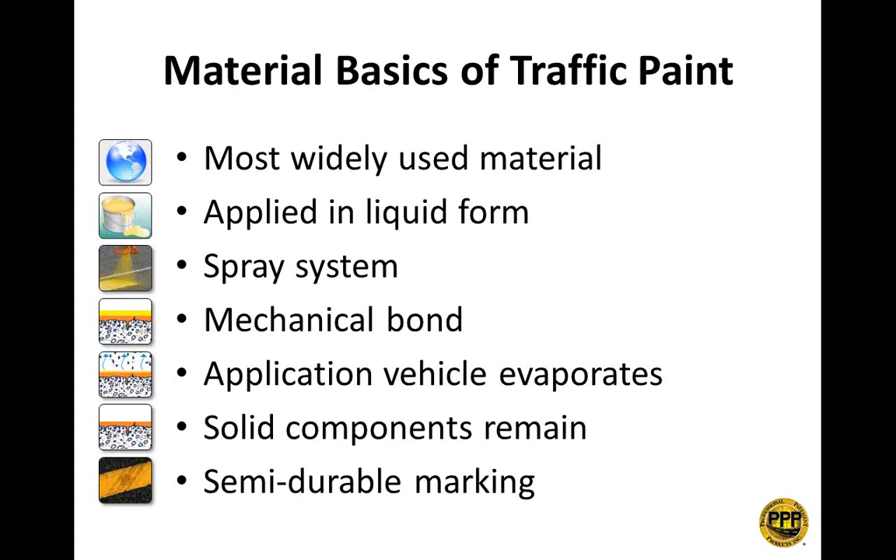It becomes what's considered a semi-durable marking. There are some advanced paints that we'll talk about in a few moments that go more to the durable side, but a paint typically is considered a semi-durable marking. So again, most widely used, it comes in a liquid form, you spray it down, it mechanically bonds as the application vehicle evaporates. That's usually water, and we'll talk about that in a moment. And then the solid components remain, and then you've got a semi-durable marking.

All right, next, 4 primary components. The 4 primary components of paint. First, we'll talk about pigment. It's either going to be yellow or white, red. It'll be the different pigment colors that we use in the paint, and that controls the color and also the opacity of the paint. And when we get into technical terms in a moment, we'll cover what opacity means. Most of these pigments are like titanium dioxide for your white, and a lead or an organic yellow pigment is used in your yellows.

Titanium dioxide is used in both white and yellow, just so that you know, and that's really what has caused, in the past, a lot of the volatility of the pricing of paint, because TiO2 has been on the rise for quite a while. Then you have the binder, and the binder, or resin sometimes it's called, is what gives you adhesion and cohesion. Adhesion is how well it sticks to the surface that you're applying it to, and cohesion is how well it bonds to itself. The resins that are typical are alkyd, oil-based, and acrylic.

Fillers. Fillers add body. Pretty much everything that is made has some type of filler in it. You either have some clays, some calcium carbonate, and so forth, to give body to the product. And then your application vehicle is what we were talking about a moment ago, and it evaporates off of the material. All it does is transport the solids and give the solids a chance to create the bonding, and then it evaporates off. And that's usually either water or solvents. So again, the 4 primary components of traffic paint: pigment, binder, filler, and the application vehicle.

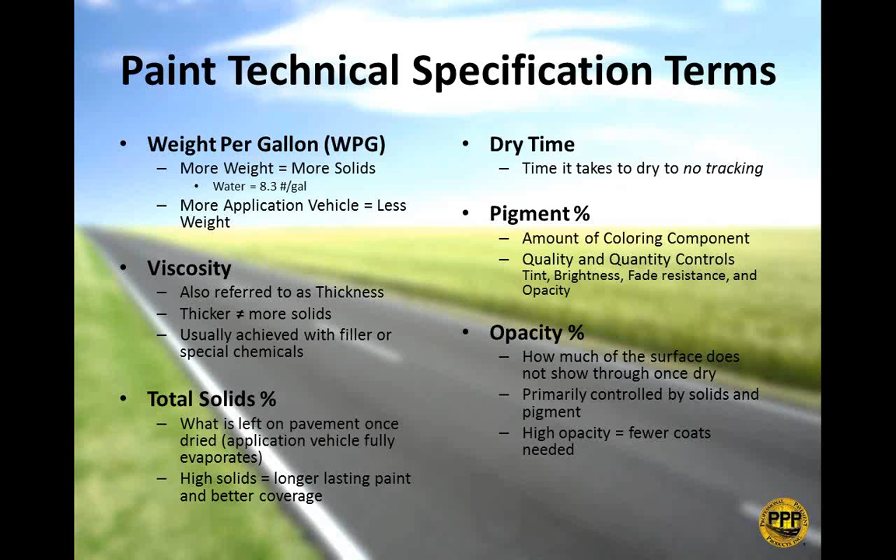All right, most of our discussion today is going to be on waterborne paints. But before we get started on that, I'd like to talk about the advantages and the disadvantages of waterborne when compared to oil-based paints. By the way, there of course are other paints like chlorinated rubber paints and so forth, and I'll be glad to answer some questions on how the paints compare. But oil-based is the primary opponent to waterborne.

Advantages of waterborne. It's more environmentally friendly. It is in the manufacturing, the application, and disposal, because remember, those are the three things that you're dealing with. You're not just dealing with somebody going to bend over and lift the stripe after application, but you also have the fact that it has to be safe to manufacture, and then it has to be safe to dispose of when either it's ground up or when you've got a pail that's almost empty but not quite empty. You need to be able to dispose of it.

It's low volatile organic compounds. Volatile organic compounds, that's what comes off of a paint or a product in the evaporation process, and so it's important that these volatile organic compounds do not escape into our environment and continue to cause the problems that we have experienced in the past and continue to experience. So it's better for the environment for that reason. And also, again, it's lead-free, and this is important in the manufacturing process and the disposal, along with the application and the applicator.

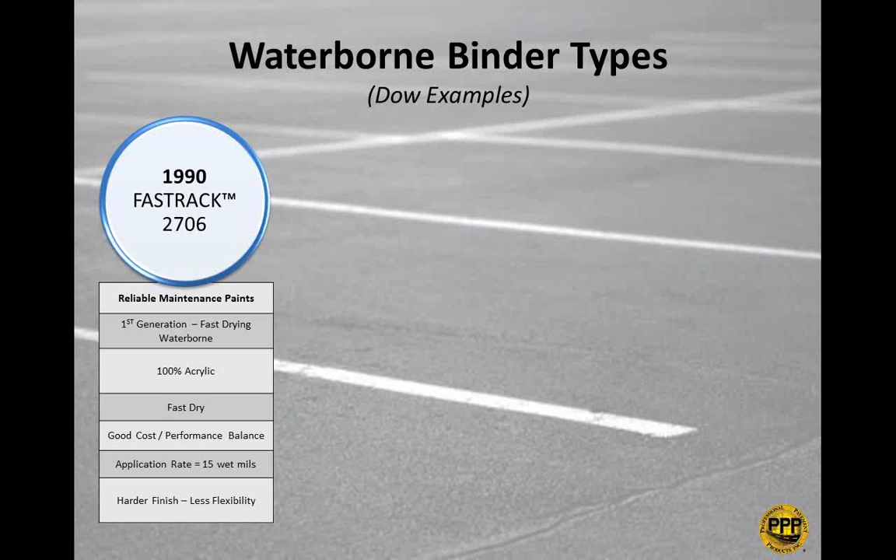It's 100% acrylic. It's fast dry. It's got a good cost and performance balance. It's economical, and it has good performance. Application rate, you put that down at about 15 mils wet. And of course, depending on your solids is what you'll end up with dry. And it has a harder finish, but as things get harder, they become a little less flexible. So this actually kind of causes a little problem, especially when

you're dealing with things. They came up in 1995 with Fastrack 3427. Now this is a second generation paint, and it's 100% acrylic, just like the first 2706. It is a fast dry paint. It's got good cost and performance balance. It's applied at 15 mils, but it creates a softer finish.

And of course, everything I'm doing here is really layman. If you're a chemist out there and you want to debate on my terminology, please do so. But to bring it down to a simple format, basically the finish is a little bit softer, but that softness also makes it more flexible, and it also has better surface and bead adhesion. 3427 works very well on concretes, more so than 2706, and I'll tell you a little story about that in a moment, my experience with that at least.

In 1999, they came out with Fastrack HD-21A. Now this is Dow again. The other company is I believe Arkema, and they have a DT211, 250, 400, so they do have products that are similar to these. Again, I wanted to make sure I mentioned that so I don't get in trouble again. This paint is designed to be high build durable paint. It's also called high build.

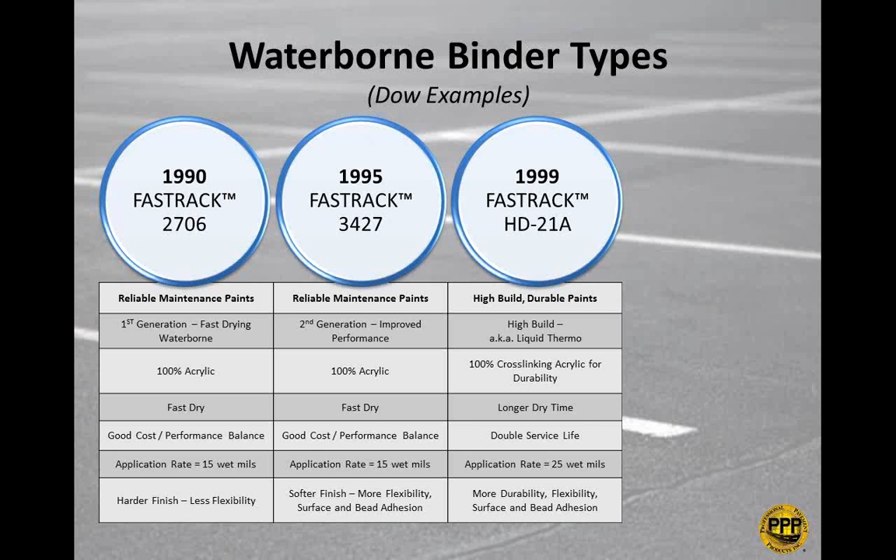It does have double the service life, 2 years plus. A great paint for that. Understand that you're using twice as much paint as well. It is more durable. It does have the flexibility, and it does have the surface and bead adhesion that is similar to or equal to the 3427.

Lastly, in 2006, they came up with the Fastrack XSR. This is a low-temperature resin binder. Low temperature conditions, that's 35 degrees and rising. Understanding that 2706, 3427, and especially HD21, you want to be at 50, 55 and rising. And you have to remember that's surface temperature and air temperature, very important. So in this particular binder, you can actually apply it at 35 degrees and rising. 100% fast release acrylic.

Fast to good dry time. You're going to definitely have some fast to good dry time, and what that means is that if you're at 35, you're going to have a good dry time. If you're at 75, you're going to have fast dry time. It certainly has lasting performance, and its application rate is 12 to 15 mils wet, and you have good flexibility over a variety of surfaces.

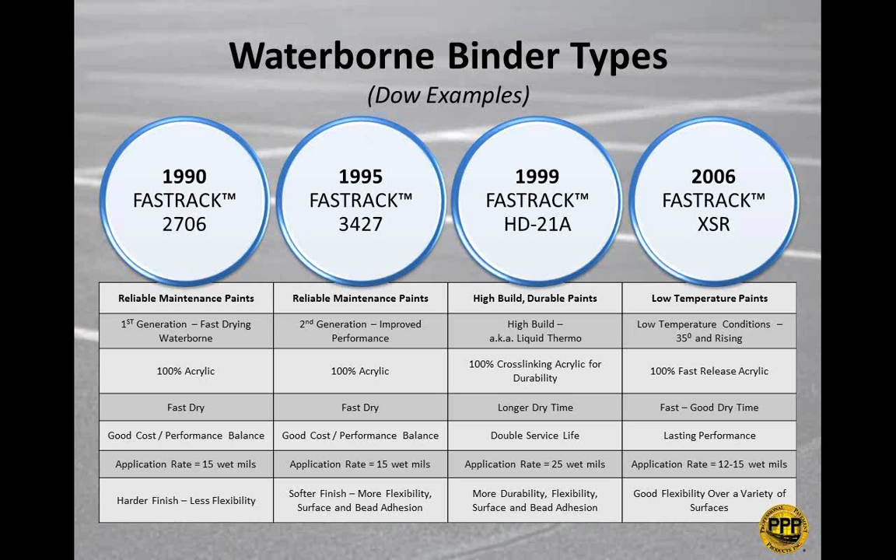So again, of these four, 1990 was the first generation, 2706. Second generation was 3427. Then we came in with the HD21, so we could get high build and longer lasting paint because we could put more of it down. The durability of a marking is directly related not only to the components it's made of, but to the thickness it's applied. So that's why, again, you put it down twice as thick, you're going to get twice the life out of it. And then, of course, the Fastrack XSR for those northern states that want to do some work as you get into those borderline seasons.

All right, here's a nice little slide I've seen. You'll see that's the alkyd oil base on the left. Then you go into Fastrack 2706. You can see how much more durable that is. And then your Fastrack 3427, which is even more durable than the 2706.

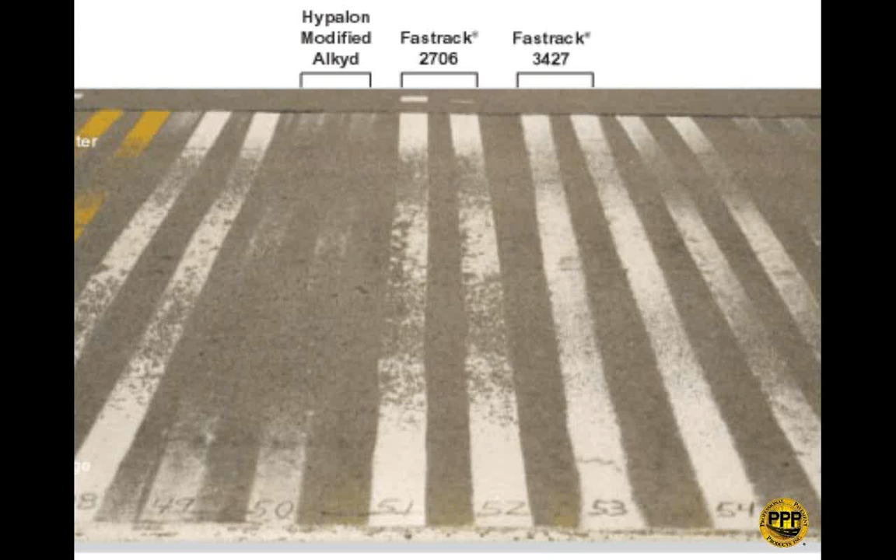All right, let's talk about the waterborne paints that we've developed in design. We have two primary waterborne paints. One is ProStripe Plus, and ProStripe Plus has been around for a number of years. I would have to say 14 years. I should know that. The ProStripe MX is not a new paint, but I think we developed that in about the 2008, 2009 range, and I'll tell you the story of why.

The features on the paints: they're both waterborne traffic paints. They both meet the federal specs of TTP 1952E Type 1 and 2, and we're going to talk about those specs in a moment. They're both lead-free. They both have low VOCs. They both have high solids, and they both are fast dry. They both have high pigment content, and they both are airless striper formulation.

When I developed the ProStripe Plus paint, the reason I went out and developed it instead of selling someone else's paint is that traffic paint is usually made in very, very large batches. And because of that large batch process, there's a lot of variance. There's variance in its viscosity, all the way down to its fills. We were having major variances.

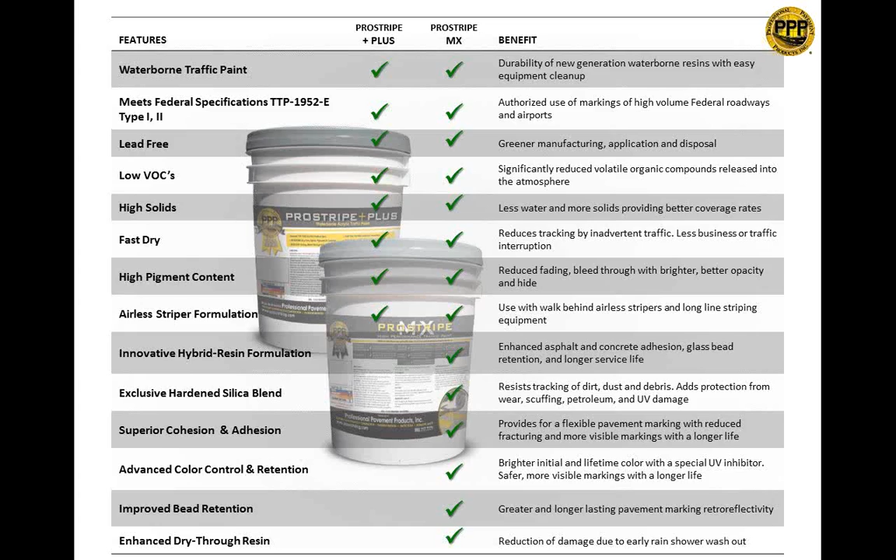Now we're going to get into specifications. I have listed before you 3 specs: TTP 1952B, TTP 1952D and E Type 2, and TTP 1952E Type 3. These are the standard waterborne specifications set by the government. So I want to go over these so that you know, when you go out and you buy a paint, this is really one of the first questions I ask. If I'm talking to somebody about paint, I'll say, okay, what spec are you going? Oh, it's federal spec. What federal spec are you talking about? Because there's a big difference between a 1952B and a 1952E Type 3, as you'll see.

So first we have the volatile organic compounds. On all 3 paints, it is low. You have a coverage rate of about 350 on the B, 350 to 390 on the D. It's usually higher in solids, and that's why. And then you have about half that in the Type 3, the high build paint, obviously, because you're doing a double application. Viscosity, 75 to 80.

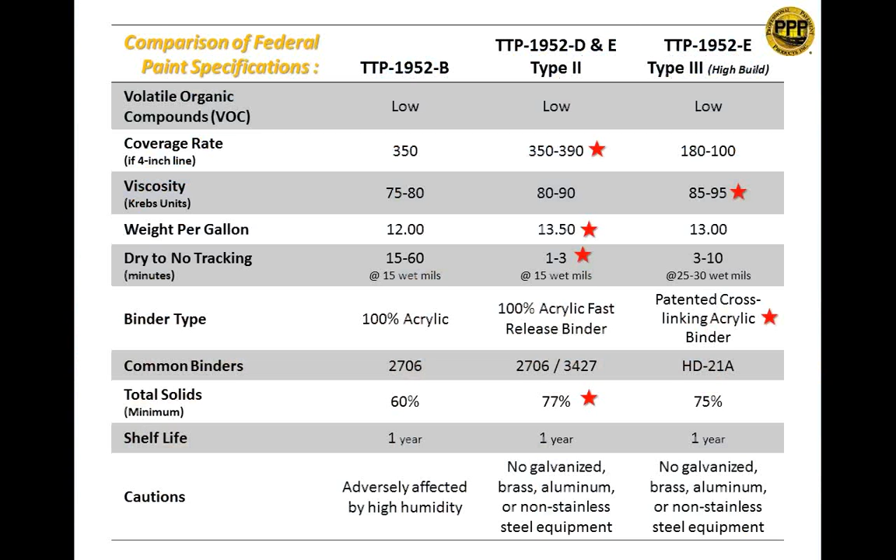And weight 13.5. No tracking, 1 to 3 minutes. You just can't beat that. The cross-linking is a better formula. Anytime you have some paint that's cross-linking, that's good. 77% solids is the highest solids on there, and that is it. So let's move on now, and I'm starting to speed up a little bit, as you'll notice.

If you could please answer this poll. What federal spec paint are you currently using the most of? It's 1952B, D and E Type 2, E Type 3, that's the high build, or gosh, I don't know, it's a bucket of some paint that we buy. So if you'd answer that question, I'd greatly appreciate it. And I'll give you a minute to do that.

We've got about 48% of you who have gotten your vote in. I'll give you just another moment. Thank you, Lynn. I cut you off on the last one. Yeah, a little bit. All right, I think we're going to get everyone we're going to get here.

We have 36% at the Type 2, no one on the B or the Type 3, and 64% say they don't know. Yeah, and you know, that's a common thing. So guys that don't know, don't worry about it, but learn about it. That's why you're here, so that you'll know the difference between what you're using. I ask this question all the time of my contractors, and they say, oh, I got this paint and it's a lot cheaper or whatever.

I'll say, okay, well, first let's start out with what spec is it. The reason that's important is because that's going to create a minimum level of specification. And although it may not be the best level, it's a minimum level that you know it at least does. So it's not uncommon to not know. Ask your supplier. All right. Thank you, Lynn. All right, we'll move on.

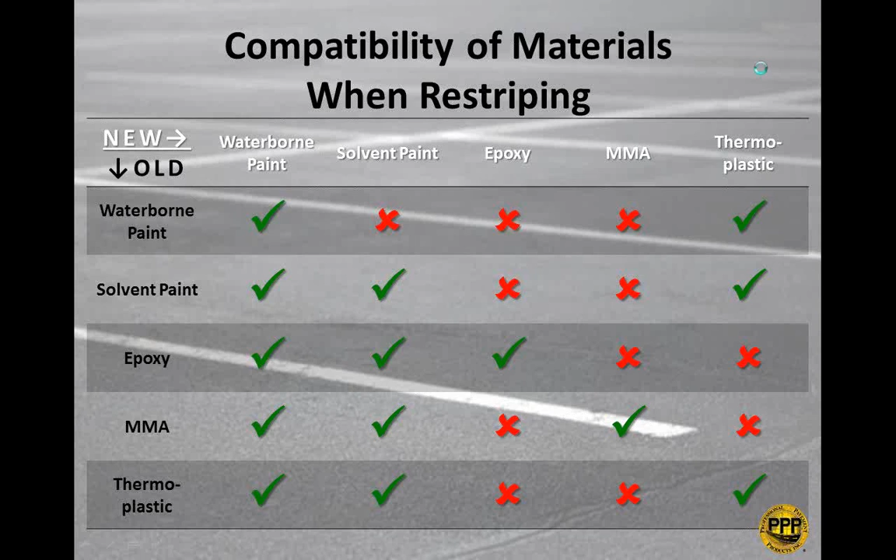All right, let's get to application. That was just materials, but we're going to buzz through the application side. I see we're well into it.

All right, so traffic paint equipment. There are two primary methods of application, and one is through a conventional air spray machine. Most of you have seen these. Kelly Creswell was a big name. MB was a big name back in the days. Looney Liner, this is Jim Creswell Looney. I think it was his grandfather that was part of the Kelly Creswell group. Anyway, great machines, durable as all get out, and I'll talk about that.

Air pressurized sealed tank, the pressure forces the paint out of the tank. The pressure in the tank forces the paint out. Additional air is at the gun at the end of the line, and it atomizes, or it sprays or spreads that paint, breaks the paint up for a smoother application. The great thing about these machines is they're durable and they're low cost in maintenance.

I had a story real quick of a guy that was moving his paint machine from one point to another point. It was a municipality, sorry, guys out there. The guy got on the hood of the pickup truck and put the paint machine in front of the pickup truck, and he was holding on to it, and the driver got too fast, and the thing got squirrely, and it actually flipped the paint machine, damaged it, bent it up, and everything else. They took it back to the shop, bent the things back in place, and shoot, they're probably still using the machine. So they are extremely durable.

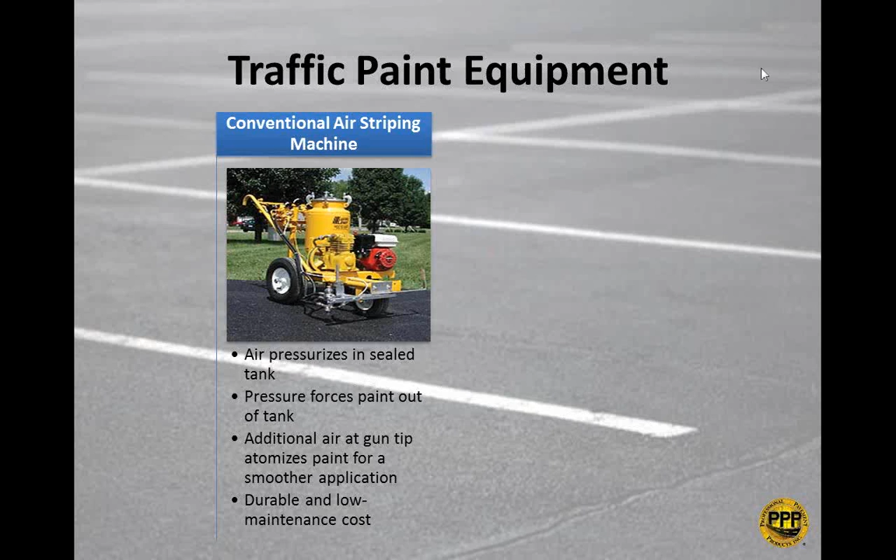However, there are airless machines, and airless machines now are the most widely used striping machines probably in the world, but definitely in the United States. Basically, how this works is the pump draws the paint from the tank. Remember, there's no pressure in the tank now, so it draws the material, and then the paint is forced into a universal gun, and why it's called universal, it can be used for hand spraying, it can be used as a down gun. On an air machine, you actually usually have a handgun and a down gun.

Then the paint exits through what they call a RAC tip. RAC means reverse-a-clean. That's where RAC comes from. A RAC type tip, and at a high pressure, it's going to spray much sharper lines, and it's much easier to operate. It may not have the durability, and I will mention also the air machines: you can go to your local hardware and get 90% of what's on that machine. Of course, now airless machines are so popular, a lot of your Home Depots and Lowe's and so forth also have airless parts now. But it used to be that you could only get those parts from the manufacturer.

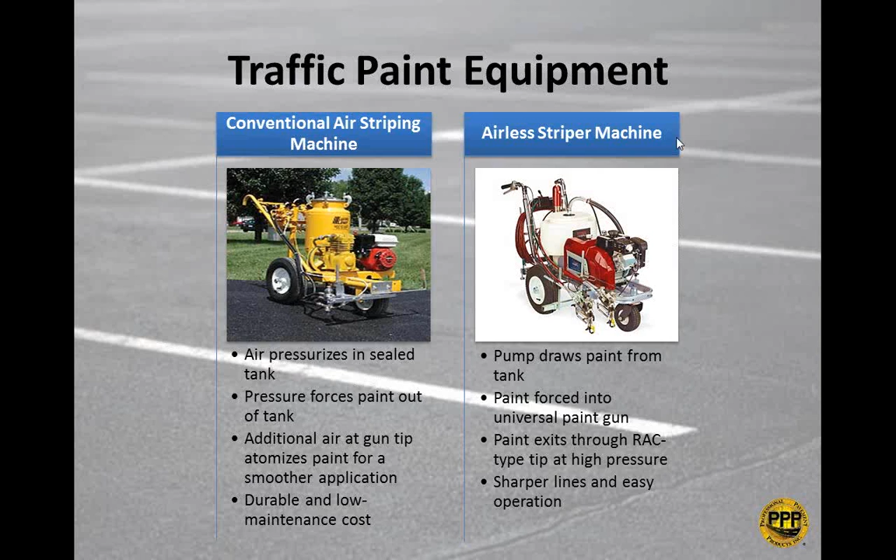But it's so easy to operate, and if you guys already operate them, you know what I'm talking about. You can put a guy behind a striper pretty darn quick. If they know how to operate a mower, they can operate the basics of striping. Doesn't mean they're a good striper, but they can operate the machine very quickly. And if you have high turnover, by gosh, get yourself an airless striper, that's for sure.

All right, so we're going to do a real quick poll here. What kind of traffic paint equipment does your organization use for pavement marking needs? Conventional air machine, an airless machine, or you're not doing paint application. Conventional air, airless, or you're not doing paint application.

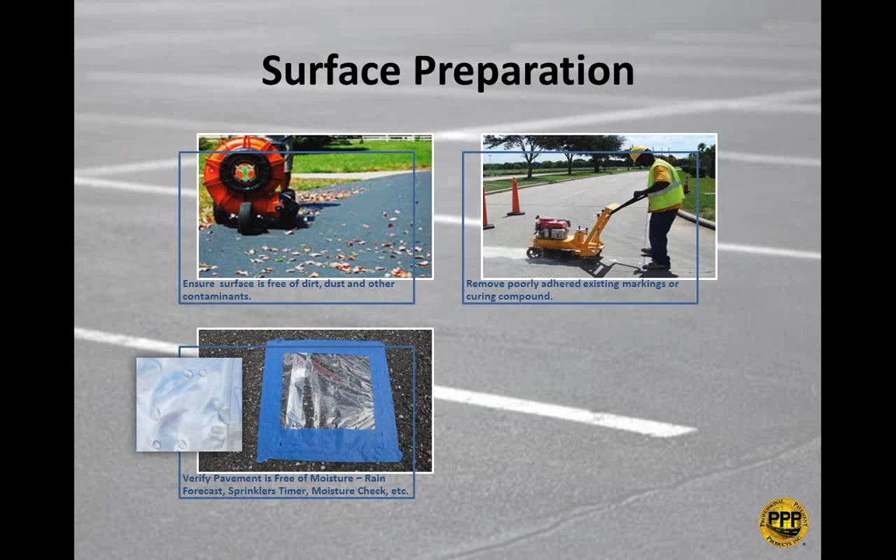That's a sweat test. You can also use roofing tar paper, do the same thing, flip it over and look. And of course, there's moisture gauges out there as well. Those run about $100 and something. I honestly haven't looked into those very deeply, but I know they use them on concrete a lot. But this is a real quick, simple test to make sure that you don't have too much moisture, especially if it's rained recently. That can be a problem.

The other thing is that you want to make sure that the temperatures are 50 degrees and rising. You don't want to be putting it down at 50 degrees in the late afternoon because it's only going to get colder. You want to make sure that it's getting warmer, not colder. And that needs to be ambient and surface temperatures. Remember, in the morning, you're probably going to have cooler surface, warmer ambient. In the evening, warmer surface and cooler ambient. That's in our weather seminar. I would love to tell you more about that.

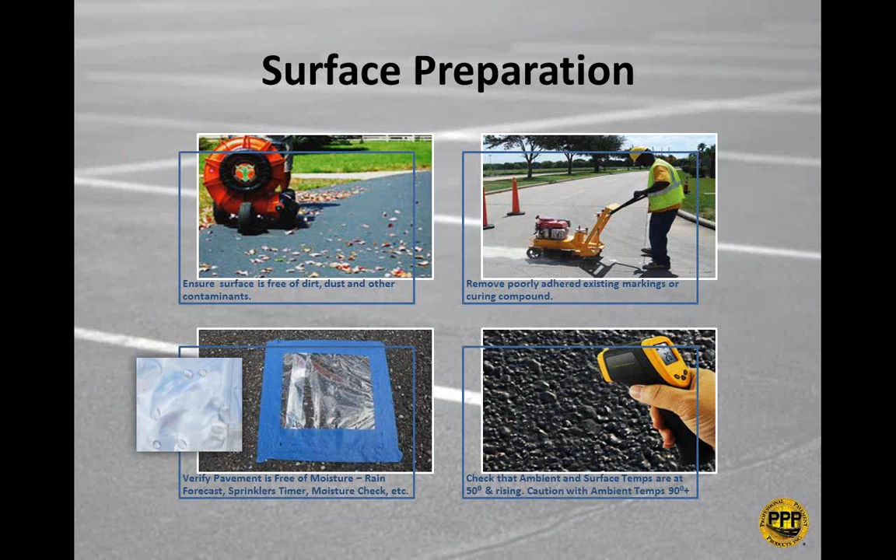Caution with temperatures above 90 degrees. If you have 90-degree ambient temperatures and that pavement is black or dark in color, you'll have at least a 30% increase in surface temperature. So that surface temperature will be anywhere between 120 to 140 degrees. So be careful.

You could have some asphalt cracking if you put the paint down at that temperature, especially if it's new asphalt. Paint application: you're going to apply it at 15 to 25 mils, and the reason there's such a big span there, you want to be at about 15 mils for your standard paints and 25 mils for your high build paints.

Second application may be necessary on porous surfaces. Keep that in mind, especially if you're speccing out a job or looking at a job or trying to figure out how much paint is going to be needed on that surface. Look at the surface. How much paint are you going to use? It all depends.

Drop on glass beads. If you're using glass beads for retroreflectivity, you need to drop them immediately behind the gun. Remember, these paints are drying in 1 to 3 minutes, especially the 1952E type 1s and 2s. They're drying in a very quick time, so that gun's got to be right behind you. You want to make sure those beads are 55 to 60% embedment so you get proper reflectivity. We'll show you a little bit of that in a moment. Protect the line until it's dry to no tracking.

Caution: parking lots with new asphalt and elevated temperatures, two thin applications are recommended. No glass beads are recommended for a number of reasons. I mean, you can, but one is you've got the whole slip and fall issues that are going on right now out there. So I don't really recommend the glass beads. And the other reason is because a thin application won't hold the beads anyway. So two thin applications are going to be much better than one thick application when you have new asphalt and elevated temperatures.

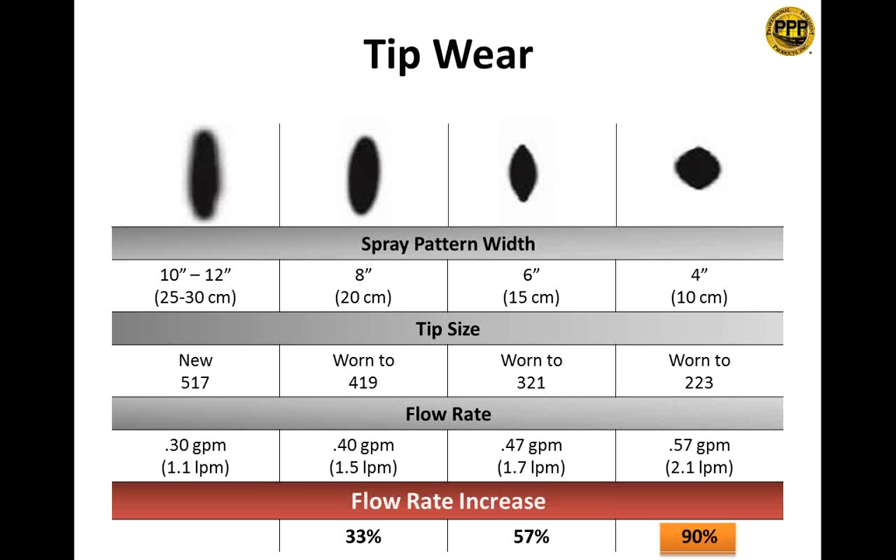You want to know when to change it? Just take a piece of paper or a piece of cardboard, tap your trigger on the cardboard, and look for these patterns. If these patterns work toward your 6-inch here, that's 321, it's time to start getting rid of that tip. And it's certainly time to get rid of it when you're at 90% flow increase. All right, so this is another chart that you can receive.

All right, troubleshooting paint. Proper paint's going to have the right size, the right pressure. It's going to be nice and smooth all the way across. If you have start and finish bulge or splatter, that's usually caused because you have a cable that's too loose, or you could have a worn tip. This goes back to that circular pattern that can occur.

The bulge in the beginning, a lot of times that has to do with you're starting from a stopped position. You're pulling the trigger at a stopped position. Highly recommend that you learn, when you're pushing that machine, to hit the line as you're rolling. You're rolling before you hit the trigger.

If you're not really good at that yet, you can use shingles, tar shingles or something like that, roofing shingles. That's a great thing to use, and you can kind of partially spray over that and then have a nice crisp line at the beginning.

So usually this has to do either with a worn tip or a loose gun cable. This is a very common one that we see; we call it pattern surging, and this is probably similar to the hourglassing. This can be from a worn tip, but mostly what I've found is that either the pressure or the power's too low on the machine. When you're dealing with waterborne paints, they're very heavy, so you go to the highest pressure you can go to, and then work your way down.

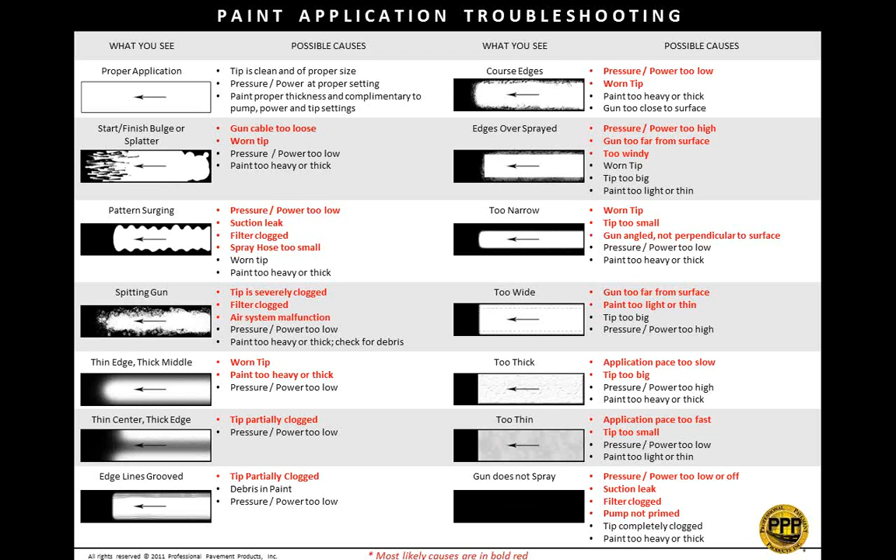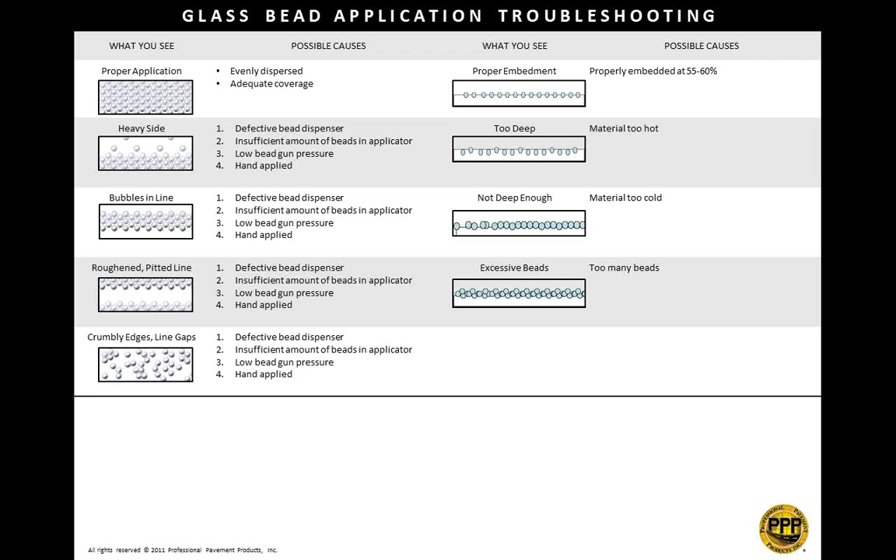And this is a glass bead chart to show you some troubleshooting and proper application of glass beads. Remember I told you 55 to 60% of the bead needs to be embedded. This is really important, and this chart is great. I don't quite remember who it's provided by, and I don't want to say the wrong name.

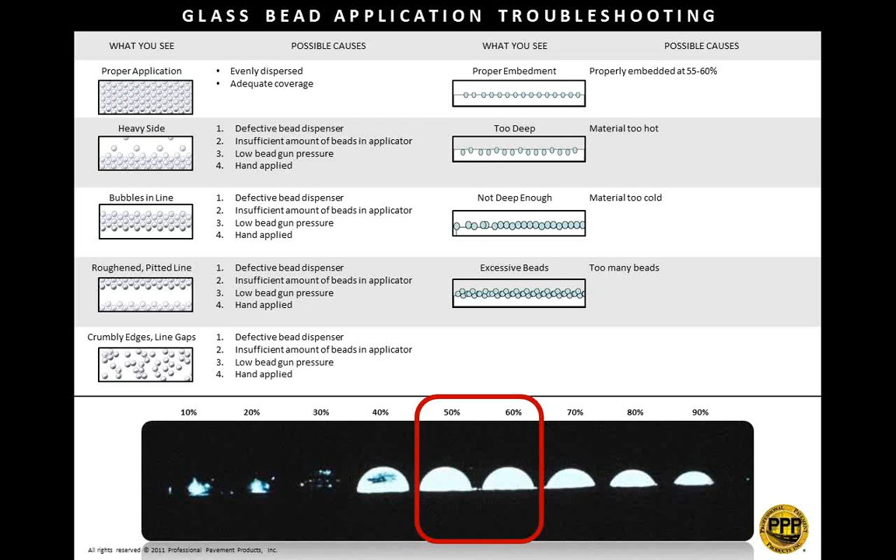But you can see if it's embedded at about 10%, you get no reflectivity at all. At 90% you get minimum reflectivity because only a small part of the bead is shown. You're better to have the beads too deep than too shallow, because as the paint wears, it'll actually be more reflective over time. But that 55 to 60% is certainly the optimum depth of the glass bead for retroreflectivity.

All right, inspection. Government agencies, let's see how many of you are out there. What is the current mix of your in-house versus contract paint application? I do 100% of our own striping; 75% in-house, 25% contract; about 50-50; 25% in-house, 75% contract; or 100% contracted. If I could get you guys to entertain us with that poll, I'd appreciate it. Okay, we got about 40% in. We're expecting about 50. All right.

So we have 36% doing all in-house application, 27% doing 75% in-house, 25% out. 18% are doing about 25% in-house and 75% contracted out. And we have about 18% doing 100% contracted out. Perfect. Thank you so much, Lynn. That's really interesting information. It sounds like a lot of you are doing all of your striping in-house, so I'm hoping this presentation is a great tool for you.

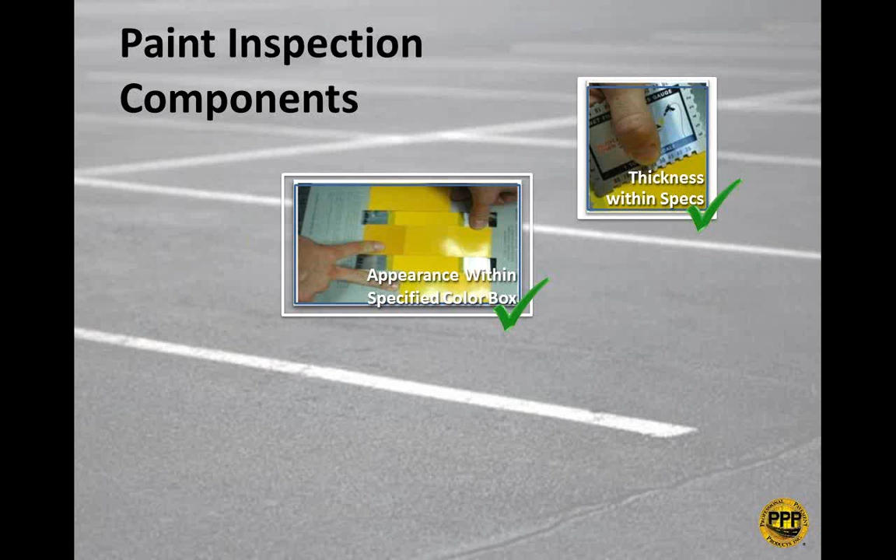So is it the right thickness? Is it the right width? There's a difference between 5.5 inches and 6 inches. One thing to keep in mind, especially the government agencies out there, is that when I used to run into this quite a bit when I was a striper, if we're painting a temporary line for a 6-inch line, we're going to paint it 5.5 inches. I know you don't like it sometimes, but we're doing that so that we can cover it properly. So there's a little bit of tolerance when we're running over it with thermoplastic. So that's the only time that line would be less width than what was prescribed.

Embedment of the beads, you want to check and make sure those beads are embedded. If you've got beads in it, get down on your hands and knees, take that magnifying glass and look, because this is really important. If those beads are sitting up on top of that paint because they put those beads on too late, those beads are going to roll off very quickly. You're going to lose all your reflectivity, or a substantial portion.

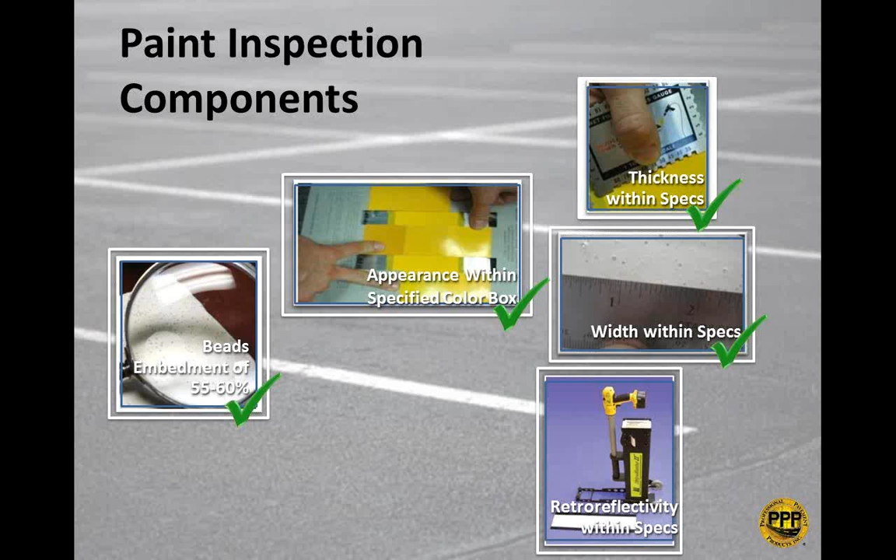You can check the reflectivity to make sure that it is within specs. This here is shown as a StripeMaster 2. They just came out with the StripeMaster 2 Touch, which is an awesome machine, easy to use, very cool. Anyway, that's the product that we use for checking all of our reflectivity, retroreflectivity.

Also, you're going to check for adhesion and cohesion, especially if there's any suspicion. Cold weather, not looking right, that kind of thing. You can take a putty knife and you actually can place it under the edge of the line and just try to pull up a piece of that line. If that line comes up clean, you got a problem. If it comes up with asphalt, you likely don't have a problem because now you've got good adhesion happening.

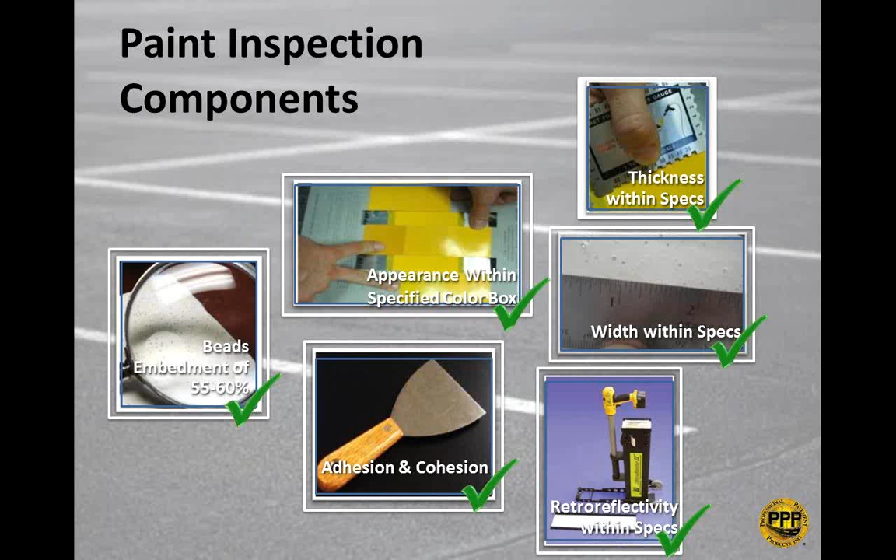So again, you're going to look at the appearance, the thickness, the width, the bead embedment, the reflectivity if necessary, and its adhesion and cohesion. And we're in the home stretch, folks.

A lot of times what happens is when we paint a line on a rough pavement surface, it'll wear much quicker. It'll at least appear to wear much quicker because most of that paint that you're seeing is on the top rock. And of course, that's carrying a considerable amount of wear because the tire's not getting on the entire surface, just on that top rock. So a rough surface can definitely cause premature wear on paint.

Ambient or surface temperature is too low. You'll see this a lot when paint is put down on surface temperatures or ambients that are too low, a lot of times especially on surface. People don't check the surface temperature, and they really should be with some type of, we use an infrared thermometer.

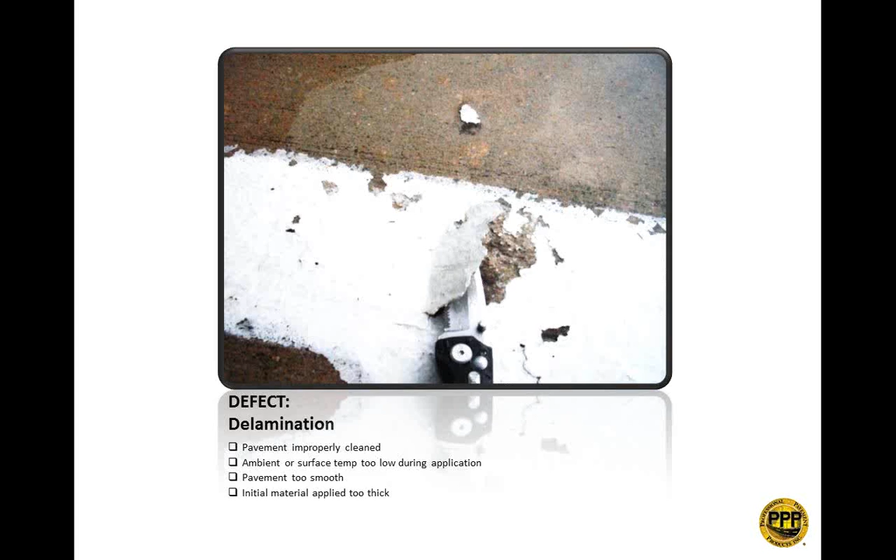Then we have pavement is too smooth. That can happen. Remember, it's what kind of bond? A mechanical bond. So if it's a mechanical bond, it has to have some type of texture to grab a hold of. Initial material is applied too thick. If you get a line too thick, sometimes it'll be more cohesive than it is adhesive. So it'll stick to itself real well, but it doesn't bond very well to the pavement. It doesn't set properly in.

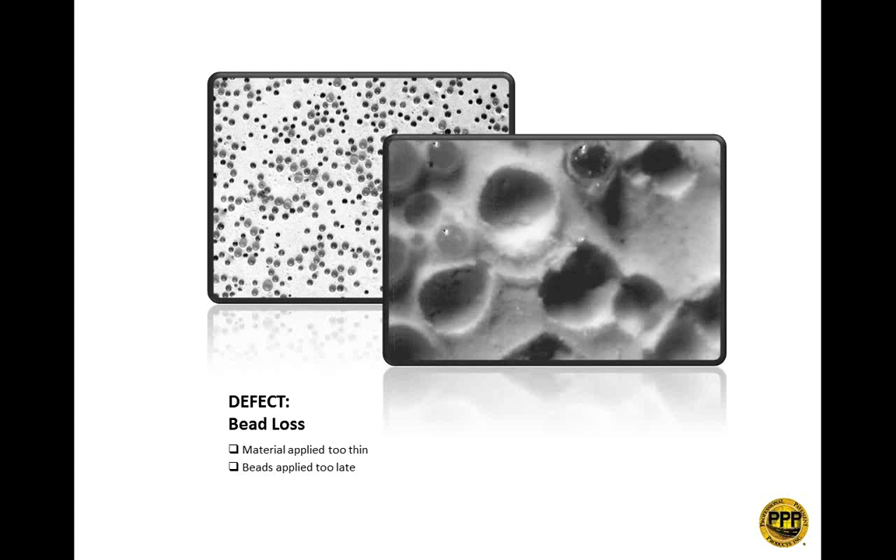Material is applied too thin. If the material is applied too thin, the beads have nowhere to bond, and the bead application was too late. We talked about that. If you put on the beads, you got a guy spreading the beads. Spreading the beads behind a thermoplastic application unit by hand is not recommended, but is more acceptable than paint, because that paint's setting up a little faster in a lot of cases. It's not so forgiving.

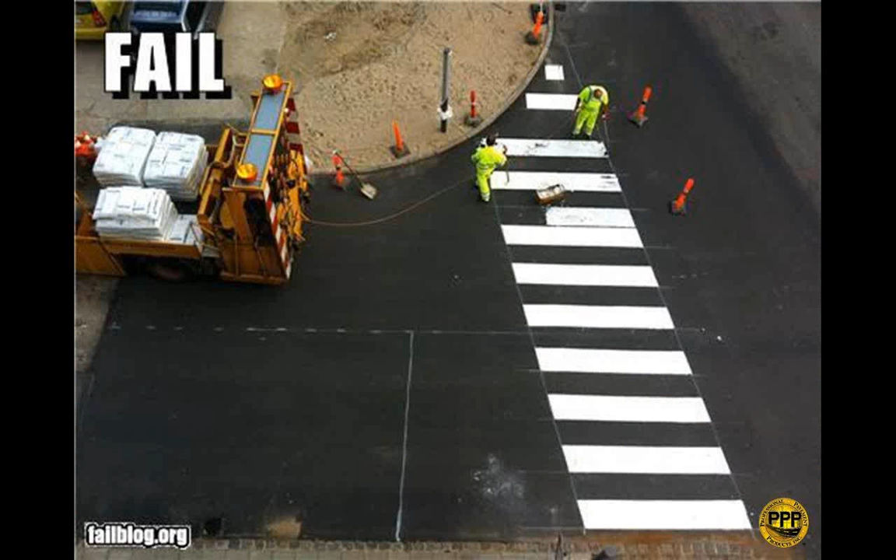Now, this is the best of all of them. This is improper layout. See if you can find that. It took me a minute. I'm like, what's wrong with this? And I realized that somebody made a mistake. I think they started on opposite ends and ended up against each other there. So yeah, improper layout in this case.

All right, we're going to go over some tips and tricks. These are submitted by the attendees, and these are really good. So please hang out for these. Always clean out the equipment at the end of the shift. It'll help prevent problems the next time you are ready to paint. Yes. Keep that equipment clean. At the end of the shift is the best time.